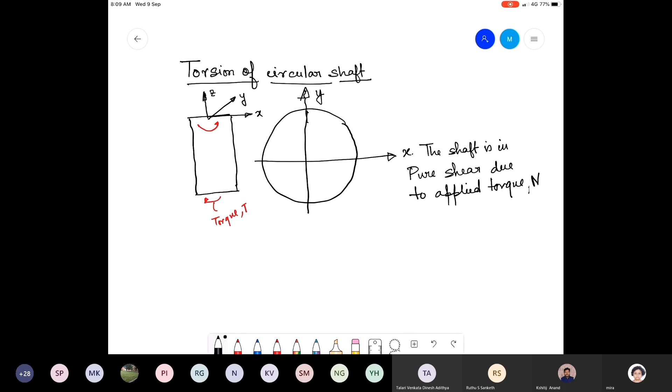Okay, so we were here where we said that there is no out of plane deformation, there is no distortion of the circular cross section in torque, and the shaft is in pure shear due to applied torque MT. Now we are going to see what would be the solution and whether the solution that we are assuming is satisfying the equations of equilibrium.

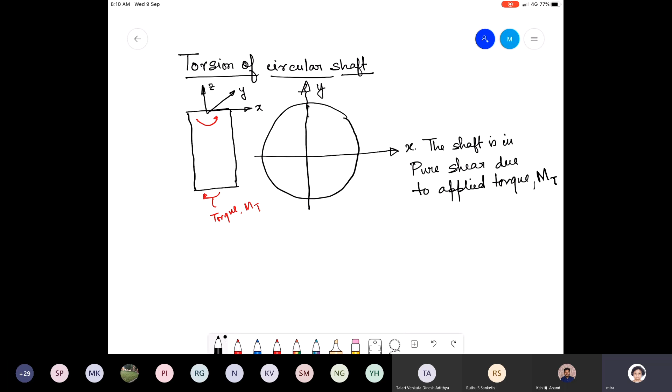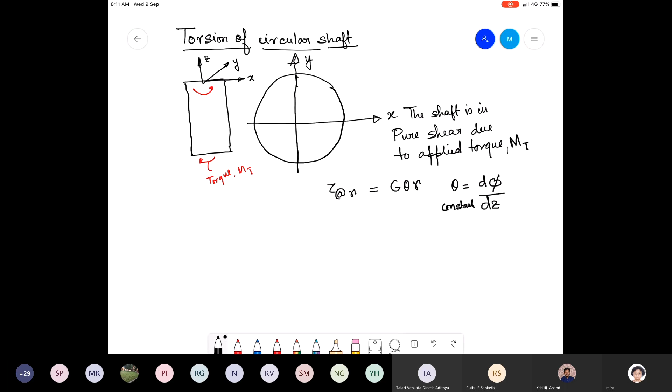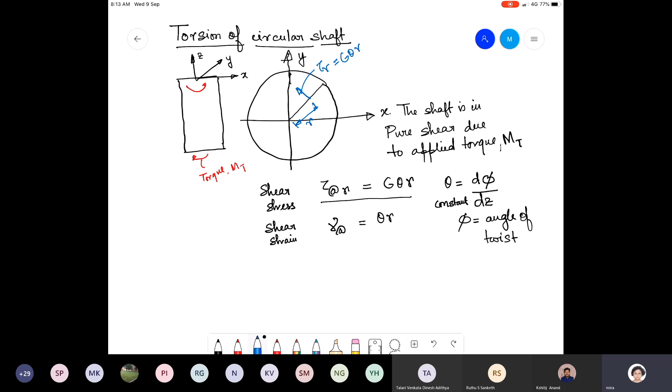Now this is given in the polar coordinate. Let us see what happens if we transform this into the Cartesian coordinate, how this stress is distributed. Let me try to draw the shear stress. At a radial distance r from the origin O, the shear stress is in the tangential direction, perpendicular to the radial direction, and is given as G into theta into r.

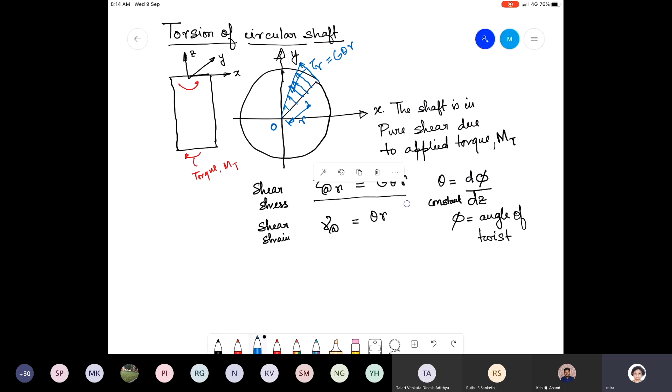So the entire shear stress distribution is going to look something like this, at every radius that you can consider. This is how the shear stress is distributed. Now, if I write this shear stress in terms of the Cartesian coordinate, I get tau xz is going to be, so let me just resolve this in x and y direction. Let me just erase this off.

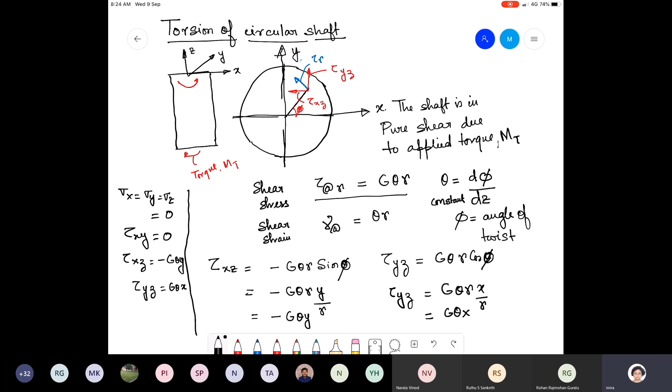So these are the stress components in a circular shaft with the applied torque. Now, let me just summarize what we have done. So from experiment, it has been observed that all the features of the torsion of a circular shaft that I discussed in the last class are derived from experiment. And based on this experimental finding, Coulomb found out that this is the solution for the torsion of a circular shaft.

So now what we are trying to do is to see whether this solution, which was derived by Coulomb from the experimental finding, is satisfying the equations of elasticity. The entire derivation is given in Timoshenko and Goodier's Theory of Elasticity in a very nice way. It's a very good read. It's also available online; there are several online copies available.

Download those copies, and there is a chapter 5 which is called General Theorems of Elasticity. That's a good read. And chapter 10 is on torsion, which we are going to thoroughly follow in the next couple of weeks. So anyone who wishes to read should look into the book by Timoshenko.

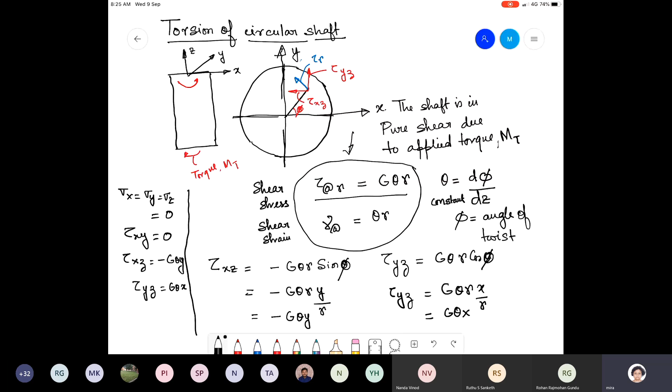Fine. So again, to reiterate, our job is to see whether this solution satisfies the equations of elasticity and is a true solution. So let us go to that problem. Let me just write down: all stresses are zero except tau xz, which is minus G theta y, and tau yz, which is G theta x. Okay, now let me write down the equations of equilibrium.

Now this is the body force, which is 0 because there is no externally applied body force. So this is 0. Now this is equal to 0. Sigma x is 0. We know tau xy is 0. Now del tau xz by del z is 0 because tau xz is just a function of y. So this is also equal to 0. Okay, so this whole thing is getting satisfied. So the first equation of equilibrium is satisfied.

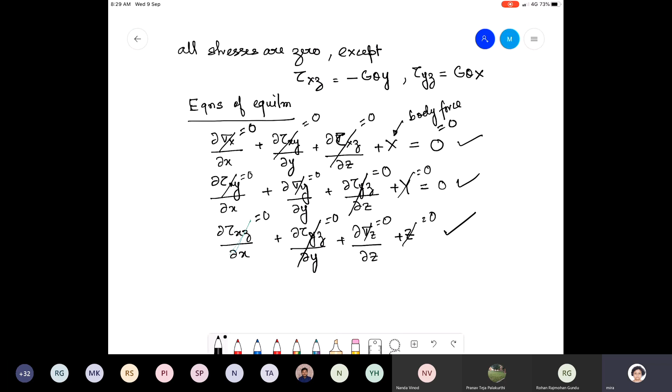So let me now go into the boundary condition. What is the boundary condition? Let us understand first. There is no applied force on the lateral surface of the shaft. So let me just draw the shaft.

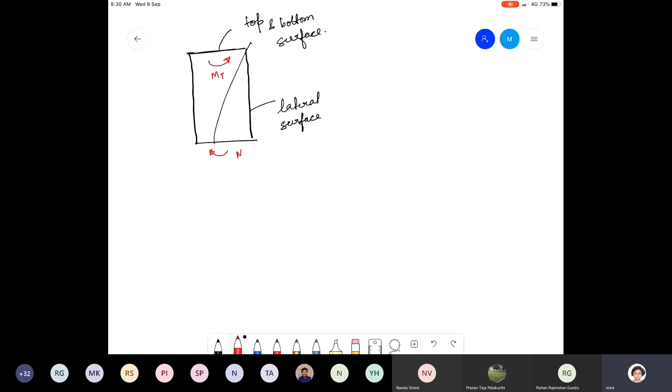So the only force that is acting is the torque mt, and the lateral cylindrical surface of the shaft is free from any force. The top and bottom surface is also free from any force. The only externally applied force or moment acting is the torque mt. So now let us see whether the solution that we have got is satisfying the free boundary condition on the lateral surface and the top and bottom surface.

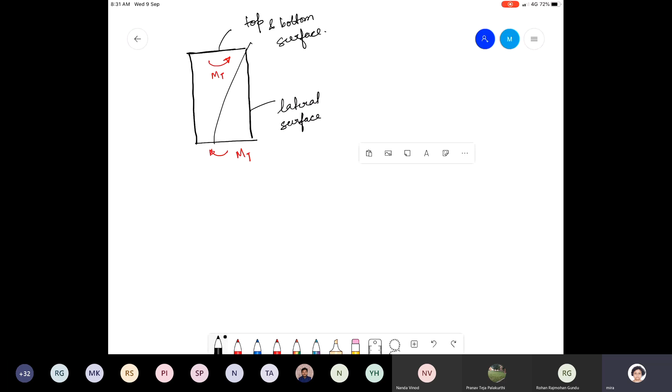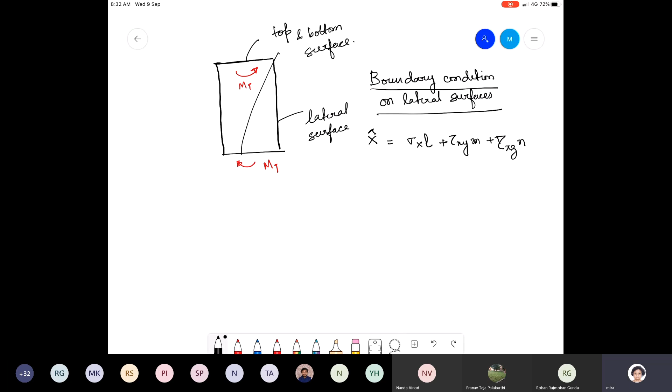Now let us first write down the boundary conditions on the lateral surfaces. If I write down the boundary condition, it is x hat, which is the surface force per area, equals sigma x... This is 0. So in the first boundary condition, the externally applied force x hat is 0, sigma x is anyway 0, tau xy is 0, tau xz is not equal to 0.

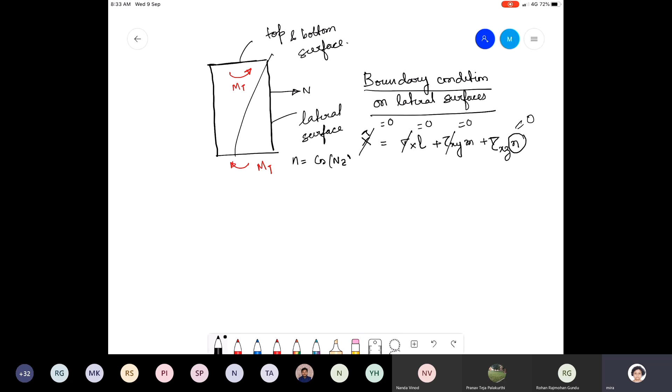But what about n? What is the value of small n for lateral surfaces? It's cos 90, ma'am. So therefore it is 0, right? Because on the lateral surface, small n is cos of the normal n with z. The normal n is making an angle of 90 degrees with the z axis. Therefore small n is equal to 0 for the lateral surface. So this boundary condition is identically satisfied. Now let us go into the next boundary condition.

Now tell me, what is the value of this boundary condition? Is this equal to 0? Just let me know. Yes, ma'am. This is equal to 0, right? Because L is going to be x by r, and M is going to be y by r.

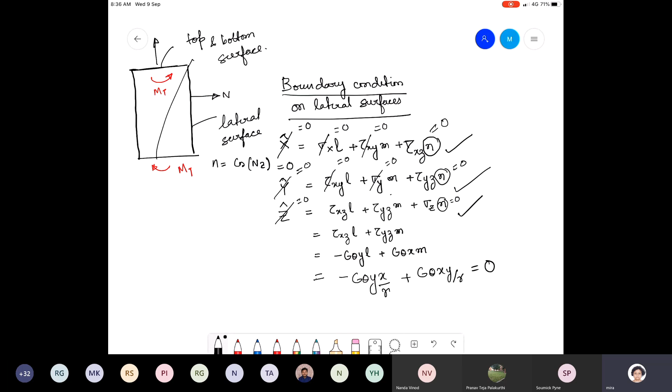So the third boundary condition is also identically satisfied. The solution that we are working with satisfies the boundary condition on the lateral surfaces. Now let us look into the boundary condition on the top and bottom surfaces.

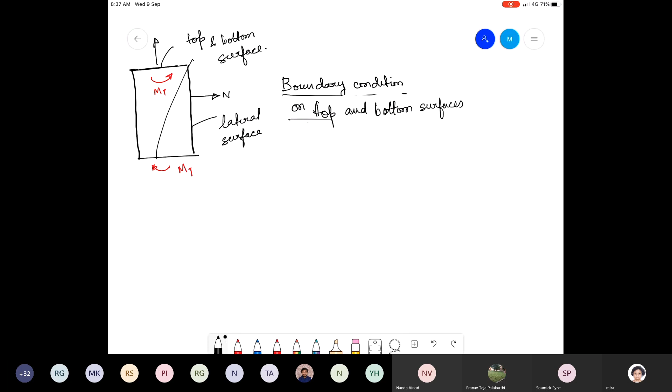Now let us look into this. Sigma x is equal to 0, tau xy is equal to 0. So I have this as tau xz. n is equal to 1 for this particular case. So I have x hat equal to tau xz, y hat...

Ma'am, won't n be -1 for the bottom surface? I should talk about it. The signs are going to just flip for the top and bottom surface, right? So though n will become -1, your tau xz is also going to be negative. So that is going to remain conserved. Now I have y hat equal to tau yz. Then I have...

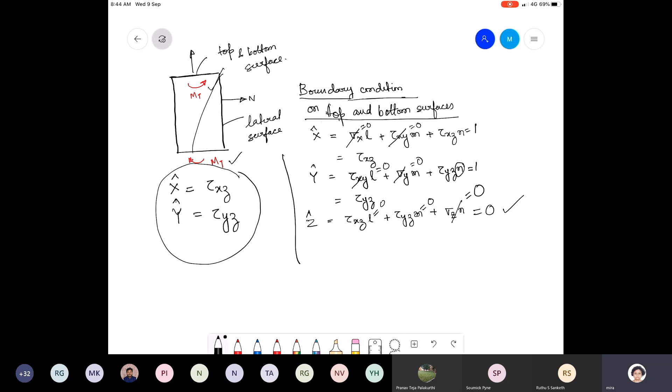Okay, I'll just reiterate. According to the solution that we have adopted, the top and bottom surfaces cannot be free from force because of these two conditions. If it is free from force, it's not the true solution. Okay, but in the real case, there is no externally applied force on the top and bottom surface. What we have is only the torque, Mt. Now, what we are going to try to understand is that this is a practically good solution, a practically acceptable solution. Let us see how. Let me erase this off.

Now, the resultant of this force is going to be the resultant of X hat and Y hat. It is this F hat resultant. Okay. So if you see F hat resultant, it's a tangential force. And therefore, if I see the resultant of the externally applied force, it should be distributed in this way.

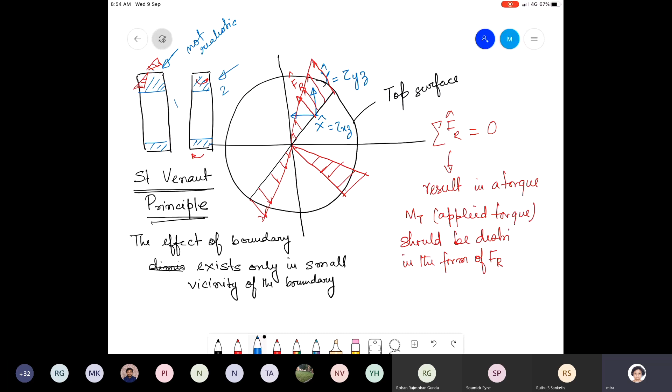Yes, ma'am. Okay, so now my point is that whether we apply the torque in the form of pure torsion or through this stress distribution, which is the real solution, doesn't matter. In real life we cannot apply the torque in this form, this is not realistic. This is more realistic. Which one is not realistic? Applying the torque in this force distribution is not realistic. We don't do it that way. You can't think of a practical example where the torque is applied in this nice distributed pattern. It doesn't happen. This is more realistic.

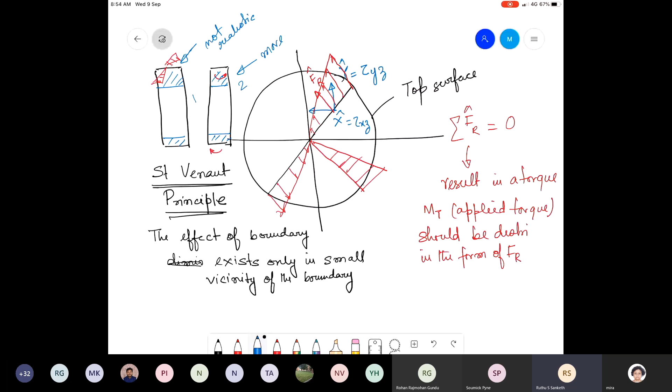So my take is that even if we apply the torque in this way, the stress distribution that we have studied is not going to get hampered in the internal domain of the shaft. There might be a small change in the boundary region, but not inside. You should keep this Saint-Venant's principle in mind. This is kind of an axiom of solid mechanics. It applies to almost all solid mechanics problems that you can think of.

There is no proof of this, but this is an experimentally observed phenomenon, and it happens in almost all cases that you can think of. Linear, non-linear, whatever. So any questions here? Ma'am, does that mean if we take a section in the middle of the shaft and observe the force distribution, or how the moment distribution is, can we say it is in the form of forces?

Wait. If you take a section in the middle of the shaft, there is no force there. There is only stress. Inside you don't have any force. Force is only on the boundary or a body force. The force can either be a body force or an externally applied surface force on the boundary. So when you take a cross section, it is only stress. And for this case, it is pure shear stress, tau xz and tau yz.